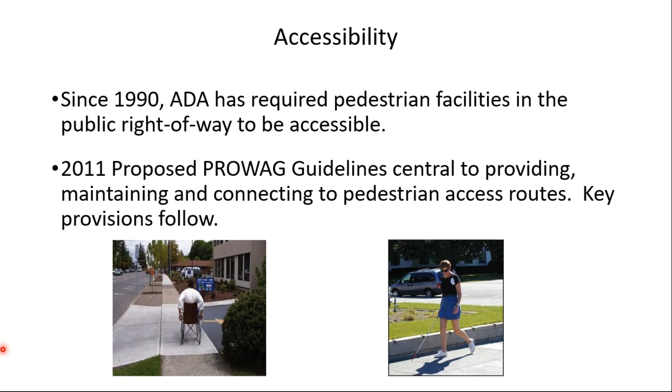PROWAG talks about what they call the PAR, the Pedestrian Access Route. Without going into the details, this is a summary of the requirements of the PAR.

It needs to be a minimum of 4 feet continuous clear width. The grade of the PAR, if it's along a road or street, can be the same as the road grade. But elsewhere, when the sidewalk departs from the street or diverges from it, the maximum grade is 5%. In fact, the maximum grade for a crosswalk is 5%, which means the maximum cross slope on a street or roadway is 5%. The cross slope of the walkway of the PAR is 2%.

The surface has to be firm, stable, and slip resistant. That implies asphalt, concrete, wood like a boardwalk, with an appropriate slip resistant mechanism if needed, or the same with a steel plank or something. But again, you have to worry about slip resistance with those surfaces.

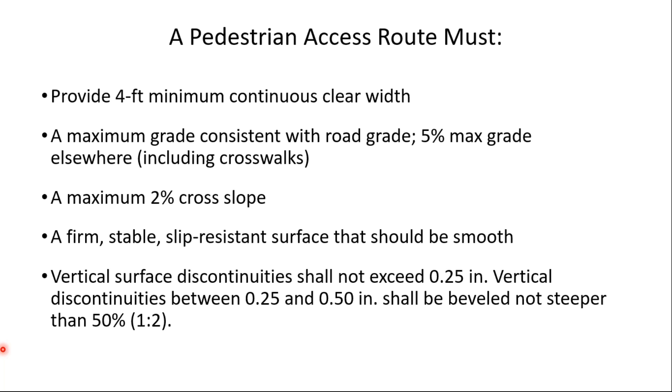It's not required, but my recommendation is that those surfaces be smooth, because for individuals in wheelchairs with certain types of spinal cord injury, vibration can be very painful. So even traveling over stamped concrete or paver block or brick can be very painful. My recommendation to designers is to make the travel surface smooth, and put any color or texture you'd like in the border area, buffer zones, or frontage zones. Also, there can't be significant vertical discontinuities in the surface, like heaved up sidewalk slabs or that sort of thing.

There should be connections, as we talked about yesterday. If your walkway or PAR is less than 5 feet, you need to have 5 foot by 5 foot passing spaces every 200 feet.

It's particularly important to pay attention to the placement of streetscape furniture. I don't want to discourage the use of street trees, bike racks, benches, trash receptacles, information kiosks - those are part of a lively, attractive streetscape. But I've seen some communities where it's organized in a way that creates an obstacle course for both blind pedestrians and individuals in wheelchairs. So if you can arrange your street furniture, or work with merchants and others in the community to arrange things so there's a 4 or 5 foot clear path, that would be better for the visually impaired and the mobility impaired.

Be alert for protruding objects - things that protrude into the PAR above 27 inches in height, like tree limbs, fire department connections, or pole mounted traffic signal controller boxes. The reason they're an issue is that a blind pedestrian can't detect them with the cane because they're higher than the cane detection area. So we should try to either eliminate them, like lopping off a low limb or branch on a tree, or else put something under the protruding object so that somebody can't walk into it or into that area.

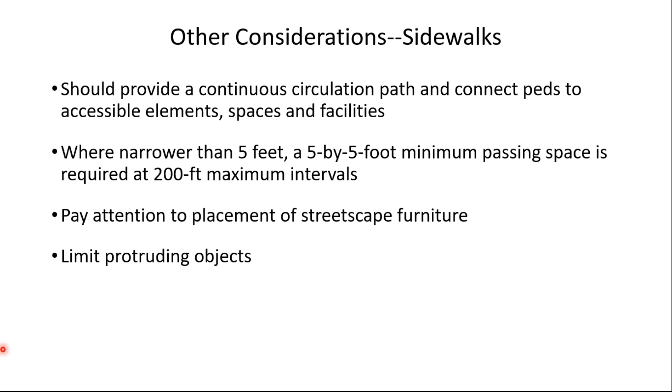We also need to make sure we provide turning spaces for individuals in wheelchairs or who use walkers or crutches, so they can turn on a level surface. When I say level, I mean 2% cross slope or less.

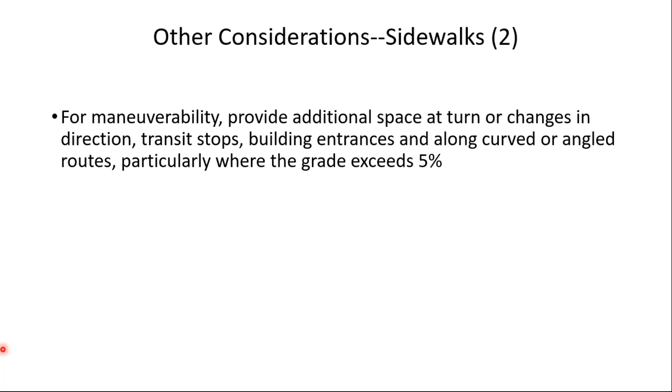So that's a quick overview of ADA, but it's important that we consider these things in our pedestrian design. I mentioned this in terms of surface treatments, paver blocks and so forth, joints - again, try to keep the travel surface smooth and put the texture and color maybe in the border areas. To me, that would be good design practice.

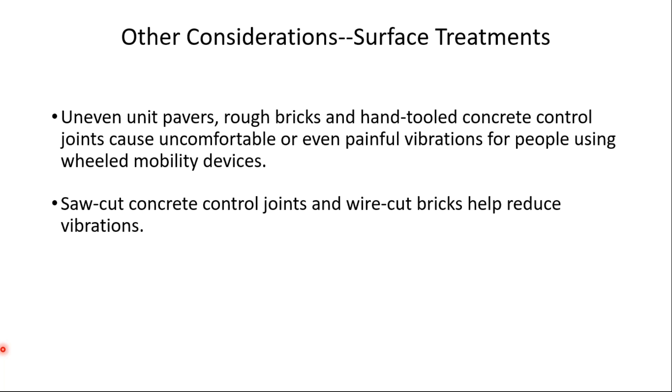And of course, curb ramps are needed to allow folks to move between the sidewalk and the street. As much as possible, they should align with the crosswalk. Diagonal ramps should be avoided since they direct pedestrians into the intersection and away from the crosswalk. Each curb ramp needs a turning space for a wheelchair or walker user to be able to maneuver. And then, at the base of the curb ramp, there needs to be the truncated dome detectable warning surfaces to alert pedestrians with visual disabilities that they're entering or leaving the roadway.

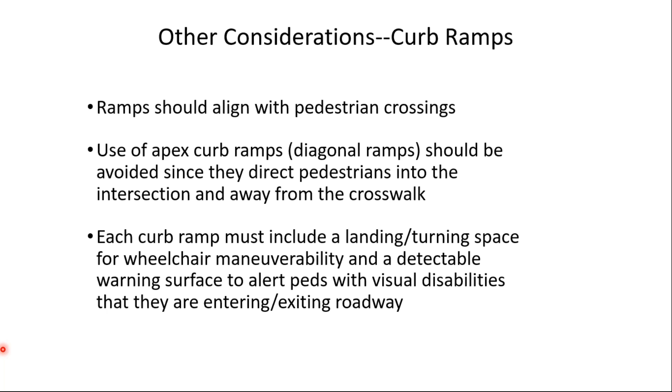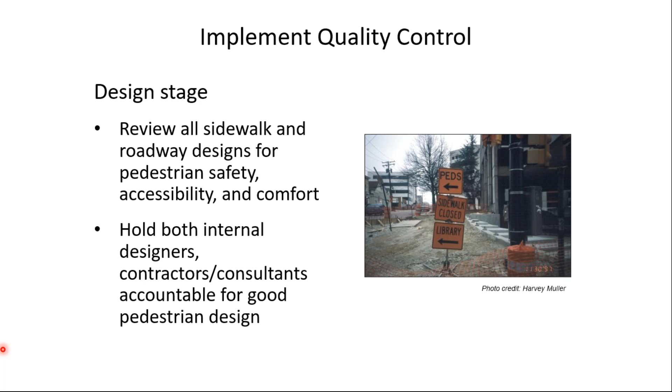We should think about quality control at the design stage. Be sure to review all sidewalk and roadway designs not only for vehicular movements, but for pedestrian safety and accessibility, and the comfort and pedestrian friendly elements we've discussed. Make sure in-house designers, consultants, and contractors are all held accountable for good, accessible pedestrian design.

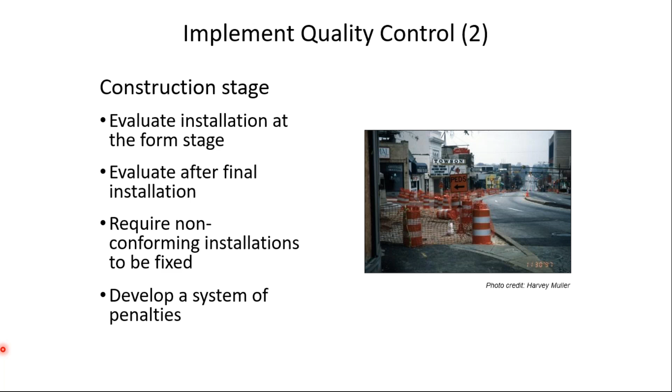Same thing at the construction stage: evaluate the installation at the form stage to make sure grades and cross slopes are compliant. After the concrete's placed, check it again, and if it's non-conforming, it may need to be removed and redone. Be sure you or someone you're directing does the actual measurements, and don't just rely on eyeballing it. People say 'it looks good to me, I've been doing this for years,' but maybe they've been doing it incorrectly for years.

Mike asked a question about what happens if there's a crosswalk you don't want pedestrians to use. We talked about posting a 'pedestrians prohibited' sign, but I mentioned that sign alone violates ADA because a blind pedestrian cannot detect that sign or get the message from it.

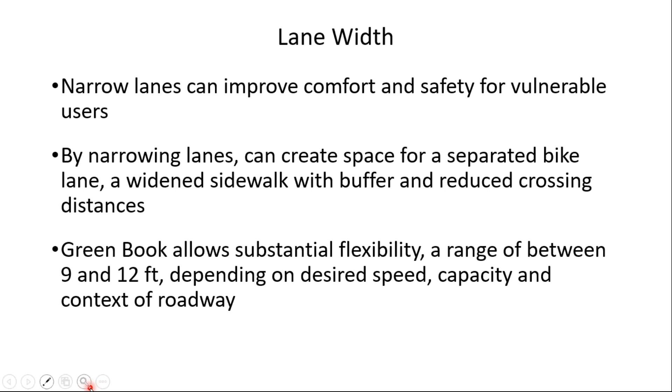So cross-section elements - the first one we'll look at is lane width, which is often an issue or concern for folks. The general thinking nowadays is that narrow lanes can improve comfort and safety for vulnerable road users, pedestrians, bicyclists. By narrowing lanes, you can create space for a separated bike lane, or widen a sidewalk, maybe allow a sidewalk with a buffer strip, and reduce crossing distances somewhat. As I mentioned yesterday, the AASHTO Green Book gives substantial flexibility here - lane widths between 9 and 12 feet, depending on desired speed, capacity considerations, and context of the roadway.

Another issue is shoulder width. If you have wide enough shoulders, that can improve bicyclist safety and comfort, especially on higher speed, higher volume roadways. The thinking is to accommodate bicyclists, a 4-foot or greater paved shoulder, continuous along the length of the roadway, should be provided, and 5 feet where you have barriers like a curb or guardrail along the road. I would certainly consider wider shoulders if vehicle speeds are greater than 50 miles per hour.

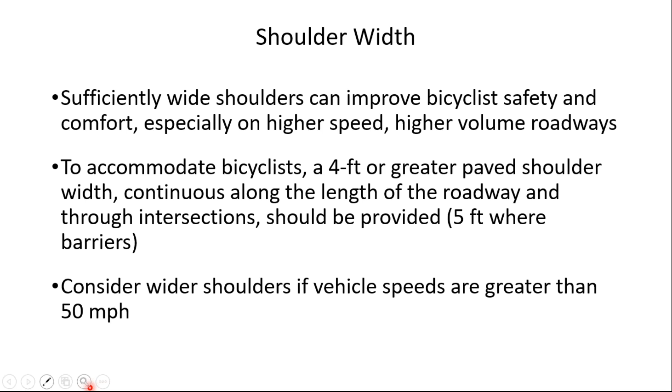When do we pave shoulders? The AASHTO Green Book gives some policies on shoulder width for different functional classes, and recommends that usable shoulders on arterials be paved. I would say designers should consider paved shoulders to accommodate bicyclists and possibly pedestrians in rural areas.

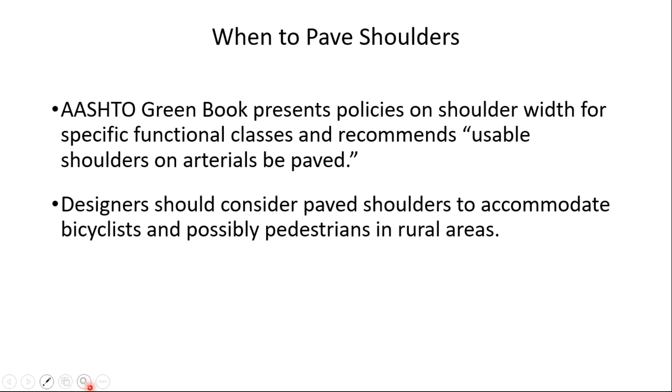Shoulders and different project types - we should think about capturing opportunities to include or upgrade paved shoulders during all types of roadway projects. Weigh the trade-offs such as safety benefits for all users, construction costs, and cost savings over the life of the roadway. The next few slides show examples during different types of roadway projects.

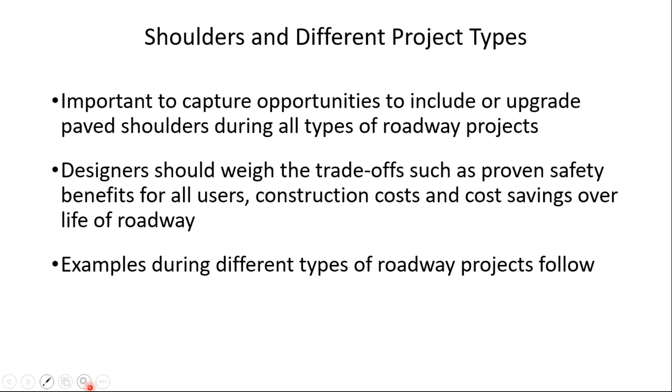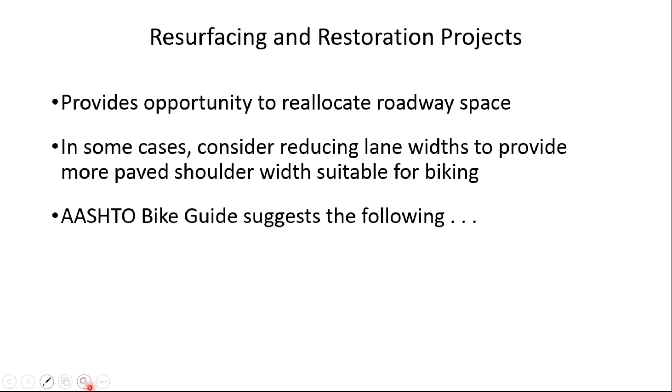The first one we'll look at is resurfacing and restoration projects. This may provide an opportunity to reallocate roadway space - consider reducing lane widths to provide a wider paved shoulder suitable for biking. The AASHTO bicycle guide suggests the following: note here on the left we have a 14-foot overall paved section for this direction of travel, a 12-foot lane and a 2-foot shoulder. But think about maybe a 10 to 11-foot travel lane and a 3 to 4-foot shoulder - still 14 feet overall width, but with the wider shoulder that would be a more bicycle-friendly configuration.

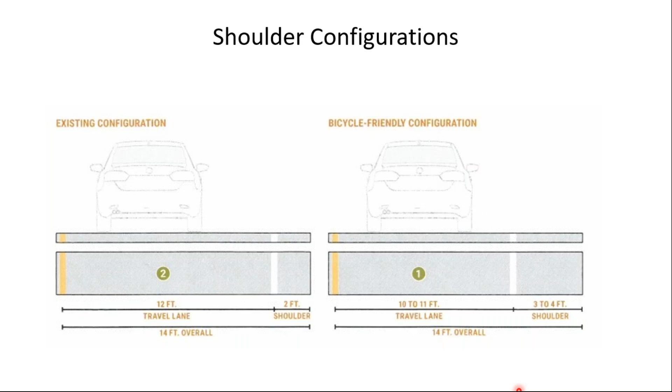What about rehabilitation projects? This could include complete replacement of pavements, which gives us the opportunity to add paved shoulders as the mainline pavements are replaced, or maybe a time to widen narrow paved shoulders, especially if you're adding rumble strips.

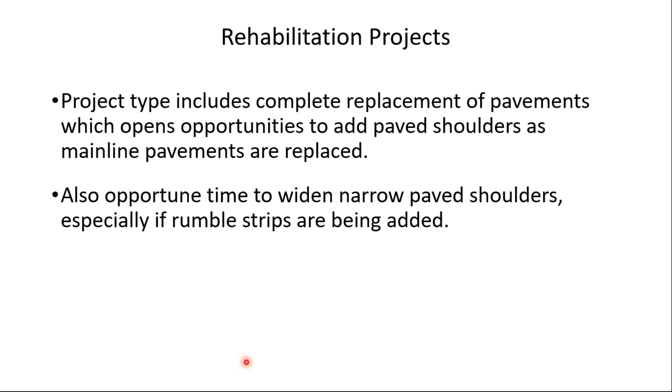What about reconstruction and new construction? Including paved shoulders on these projects is cost effective and should be considered both in rural and suburban arterial projects. Maybe a good time to think about other treatments like separated bike lanes, shared use paths, and sidewalks. These may be more desirable in urban and suburban locations where you have higher pedestrian and bicycle demand.

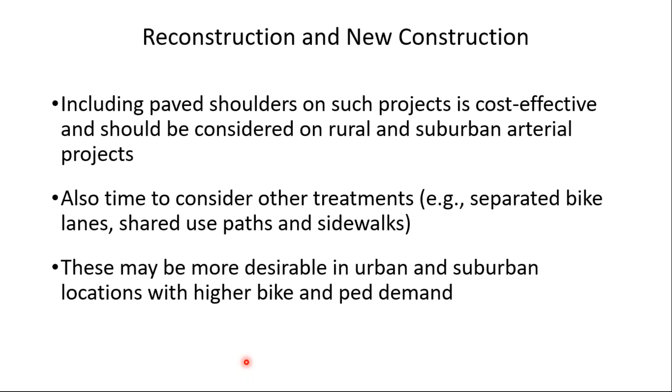And rumble strips, I showed you an example earlier from Mississippi. The AASHTO bike guide recommends a 4-foot clear space from the rumble strip to the outside edge of the paved shoulder, or 5 feet if there's an obstacle or barrier like a guardrail or curb. A reduced rumble strip length, or edge line rumble strips, or rumble stripes can be considered to provide additional shoulder width for bicycles.

Just one thing to keep in mind, I always trip over this myself: when they say rumble strip length, that's what I would call the width. It's measured laterally along the roadway, but in rumble strip terminology it's called the length. So instead of say a 10-inch rumble strip, you'd use maybe a 6-inch or even 4-inch rumble strip to provide additional shoulder width for bicyclists.

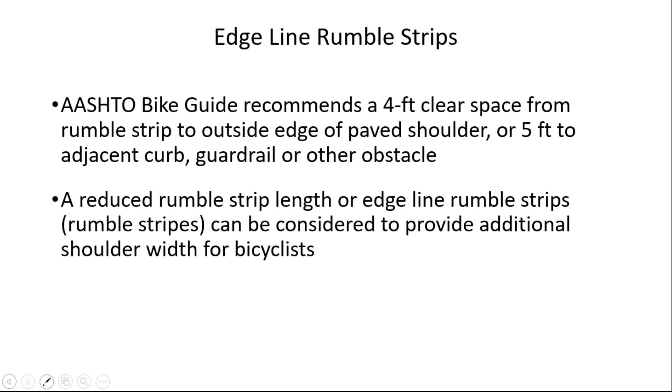Here are some sample cross sections. This one at the top I've called undesirable for bicyclists, notice it's a 2-foot shoulder with maybe a 16-inch or 12-inch rumble strip. So the shoulder is basically unusable by bicyclists because the rumble strip takes up the entire shoulder.

Here's an adequate cross section. Notice this is the narrower, shorter length rumble strip, maybe 6 inches. And notice this is the rumble stripe, where you place the pavement marking over the milled sections - that's called a rumble stripe. That allows additional shoulder width, in this case greater than 4 feet or more.

Down below is what I'd call a constrained cross section. The shoulder is less than or equal to 4 feet, and part of it is taken up by the rumble strip here, which looks a little longer than the one in the middle view. Certainly the bicyclist could use this shoulder area, but it's more constrained than the one above it.

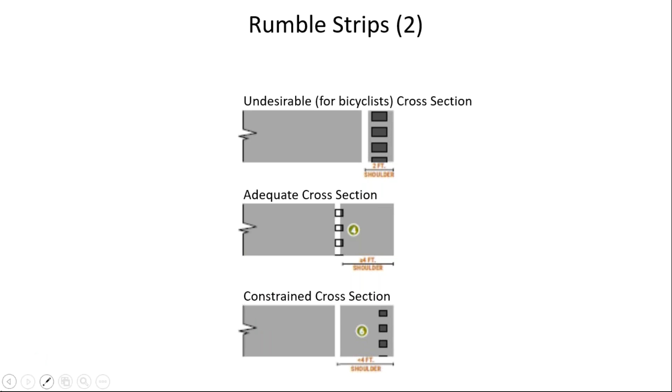Also, the AASHTO Bike Guide recommends providing 12-foot minimum gaps in the rumble strips, spaced every 40 to 60 feet, to allow bikes to enter and exit the shoulder as needed, so they don't have to pass over the actual rumble strip. Some agencies use what they call bicycle tolerable rumble strips, which aren't quite as deep as a normal rumble strip. But the bicyclists I've talked to still don't consider these to be very rideable - they may be called bicycle tolerable, but I'm not sure all bicyclists would agree with that.

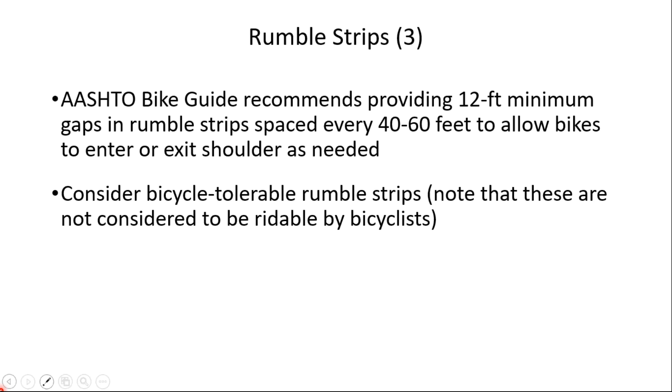Here's an example of what I'm talking about. Notice here's the travel way in one direction, here's the edge line, and here's our edge line rumble strip. But notice here's a 12-foot or more gap, spaced every 50 feet or so, so that the bicyclist can move between the traveled way and the shoulder. Studies show that in terms of roadway safety, this still provides the warning function for motorists that might leave the road, but also is much more bicycle friendly.

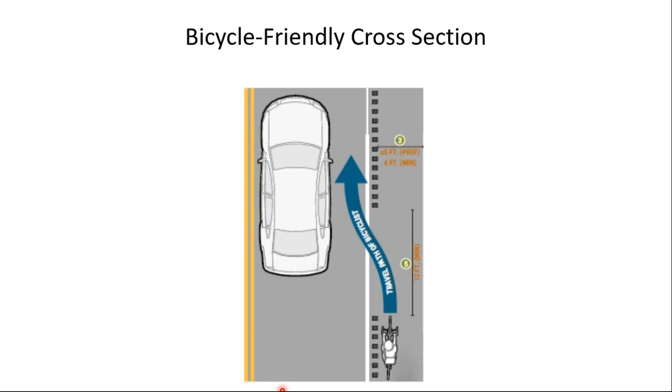To me, this would be a practice to avoid. Notice with the location of the rumble strip there, the shoulder is essentially not usable by bicyclists. It might be better to have the rumble strips here at the back edge of the shoulder.

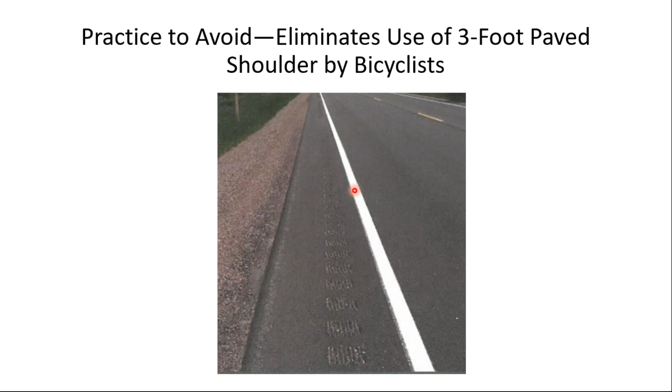Rumble strip placement - I forget exactly when, but it's been a few years now - FHWA sponsored some research that concluded that for rural 2-lane highways, not for freeways or limited access roads or other functional classes, there's no relationship between longitudinal rumble strip placement and crash reduction. So what that's saying, if you'll allow me to back up: there shouldn't be any effect on crash reduction if we put this rumble strip at the back of the shoulder versus here, or versus a rumble stripe. On rural 2-lane highways, this FHWA-sponsored research indicated there's really no relationship between rumble strip placement and crash reduction.

Placement according to the AASHTO criteria I shared with you - at least 4 feet of usable pavement shoulder between the rumble strip and the edge of the paved shoulder - has the least negative impact on bicyclists. If you can't provide at least 4 feet of pavement, placing the rumble strip at the edge of the paved shoulder, and narrowing it if necessary, will give the most paved shoulder to be used by bikes immediately adjacent to the travel lane, as I said with respect to the previous photo.

This would be the bicycle-tolerable rumble strip, 0.375 inches deep, that's 3/8 inches, and as narrow as 6 to 8 inches. It gives an alert to drivers but gives more space for bikes to operate. It's also not quite as deep as the conventional rumble strip, but I'm not sure everyone would agree it's bicycle tolerable. Still, I'm certainly a fan of narrowing your rumble strip.

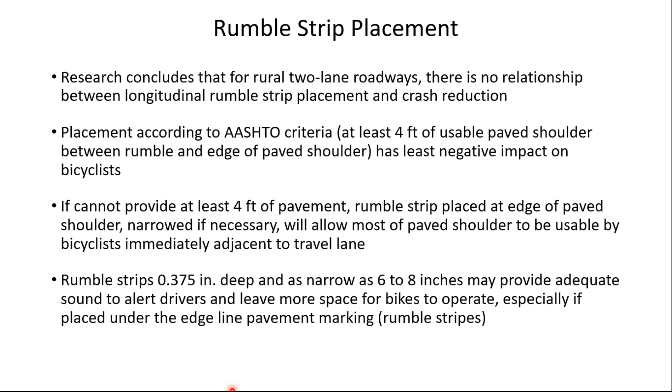But I should note, in general, a shoulder, even a paved shoulder, is not part of the pedestrian access route. There are a few locations I'm aware of around the country where the paved shoulder has been designated as part of the pedestrian access route, and in that case it does need to comply with the PROWAG requirements.

A big issue with that, to me, is how do you separate the traveled way from the shoulder for the blind pedestrian? You need some sort of detectable edge or guidance surface to prevent the blind pedestrian from accidentally wandering out into the roadway, which is certainly not a good situation.

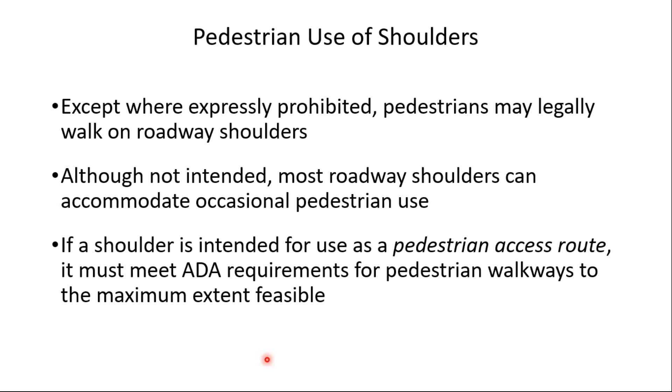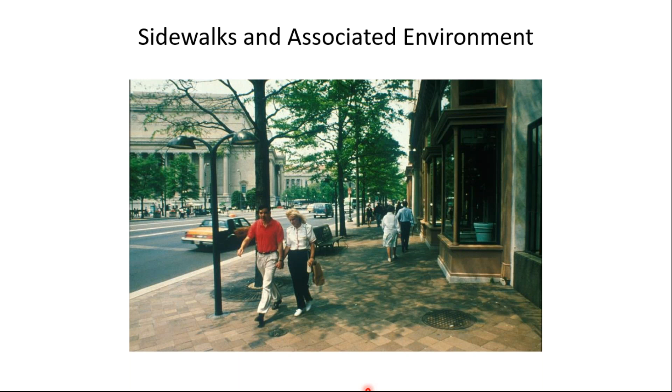Buffer strips, furniture zones, or tree lawns - I saw a slide once with something like 100 different names for that configuration, but they are desirable as part of the pedestrian environment. They improve pedestrian safety and enhance the overall walking experience. In northern areas, like in Ohio or West Virginia, they provide snow storage, some splash protection for pedestrians so they're not right at the back of the curb, and give some space for street furniture. So there's a number of advantages.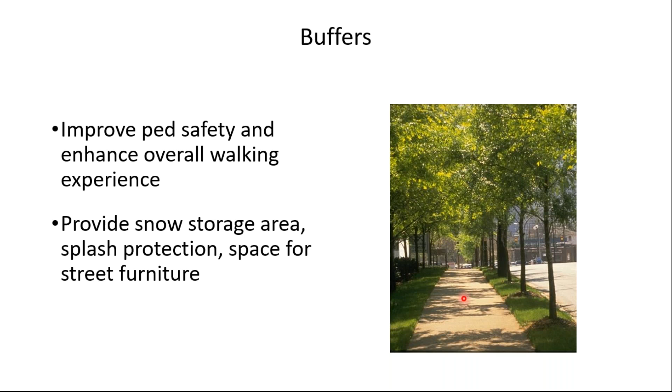As I alluded to earlier, I think it's important, if it's not your area, to seek help or the expertise of an arborist, an urban forester, or someone with that experience and knowledge who can recommend appropriate tree species for this particular situation. And maintenance or tree trimming, vegetation management is important so that we don't have low-hanging tree branches or limbs that can become protruding objects for the visually impaired, or really for any pedestrian, but specifically for the visually impaired.

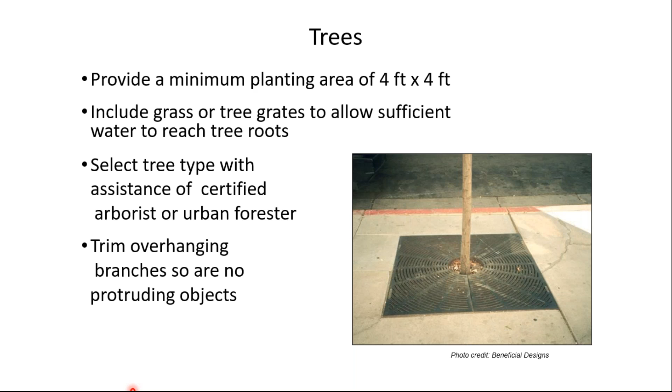I don't know if anybody has these, but questions sometimes come up about serpentine sidewalks. If folks have comments or experiences, I'd be glad to hear those.

My opinion is that for a sidewalk like this, along a road or street where you're probably going to have people walking from home to school, home to the pharmacy, home to work, or whatever it might be - using walking as a transportation purpose, or even for moms and dads pushing strollers - people are interested in getting from point A to B in the least distance, the least effort. So a serpentine sidewalk doesn't provide that.

These may be appropriate, in my opinion, in an area that's historical or natural, or some other area, maybe a park, where people might wander slowly through with interpretive displays or something like that, and they're not trying to get from point A to B to some destination, like to work or to school or whatever it might be.

But also think about if you're a blind pedestrian using a cane trying to follow a shoreline - that would be crazy to try to follow if you were blind, or even someone in a wheelchair. You'd probably have to keep turning your wheelchair to navigate some of those turns, and that's just an unnecessary expenditure of energy.

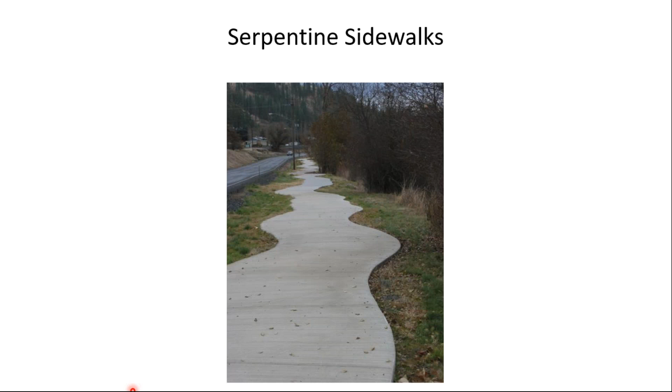Or even imagine you're the person with the skid steer or the tractor with the broom on it clearing snow off of that in the wintertime - that's not going to be a straightforward job either. So I've heard that developers like these because they look good on Google aerial photos, but from a practical, functional standpoint, I'm not a fan of serpentine sidewalks.

Many of you are familiar with the highway capacity manual and the level of service concept for vehicular traffic. We might consider what goes into pedestrian level of service, because it's a totally different perspective than motor vehicles, which consider things like speed, delay, and spacing between vehicles. Those are not really issues for pedestrians.

So here are some things that might go into considering pedestrian level of service, some of which we've talked about already. One is personal safety, meaning the threat of a crash with a motorized vehicle, a bicycle, or an e-scooter—personal safety relating to conflict with other road users.

But then there's also the personal security aspect, which I mentioned yesterday—fear of assault more generally, not a specific traffic safety threat.

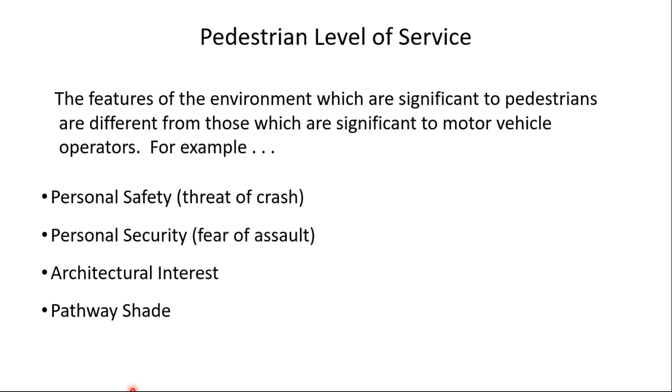I also mentioned architectural interest as a consideration. Motorists on a high-speed roadway are probably not looking at architectural features adjacent to the road, but pedestrians can and often are interested. Pathway shade and street trees are important—I showed you that scene from Las Vegas yesterday that lacked any sort of tree or shade at all. Pedestrian scale lighting, like we saw in that Pennsylvania Avenue scene.

And then amenities such as benches, information kiosks where appropriate, and pedestrian scale wayfinding—distances and directions to pedestrian destinations.

Interestingly, the presence of other pedestrians tends to draw more pedestrians, because the number of people tends to draw more. You may have seen that in the street scene I showed you in Seattle yesterday—that was a Sunday morning, but by afternoon that sidewalk may have been filled with pedestrians. I mentioned our trail system here in the Morgantown area—on a nice spring day, some people show up walking, biking, or on inline skates, and it draws other people as well, becoming kind of the hub of the community at that time. So the presence of other people makes something more attractive.

And then, we'll talk about this later, conditions at intersections where pedestrians have to cross roadways or bicycle facilities need attention, because those conflicts or potential conflicts, and how they're handled, are something to consider.

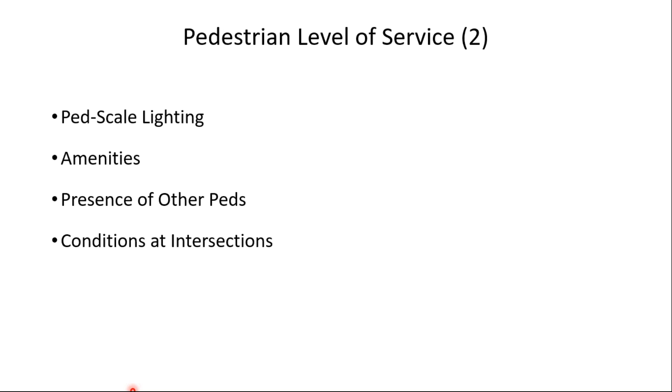Another thing to consider, where you have it, is to take advantage of water. This may not be a typical example—this is Portland, Oregon, their waterfront along the Willamette River, which can handle ocean-going vessels this far up, creating interest from all types of maritime vessels. You can see it's attractive.

It is drawing people—they're not in the foreground when I took the picture, but you can see a number of people in the background. It's an interesting streetscape that attracts people and is part of an active pedestrian facility, an active community. It doesn't have to be on this scale.

Where I am in Morgantown, West Virginia, we're on the Monongahela River, which flows north to Pittsburgh. I've been here over 40 years, and when I first came, the river was mostly ignored, other than for commercial barge traffic hauling coal out of the region. The buildings had their backs to the river, and no one would really even go near it. But things have changed, and I think nationwide attitudes about rivers and waterways have changed too.

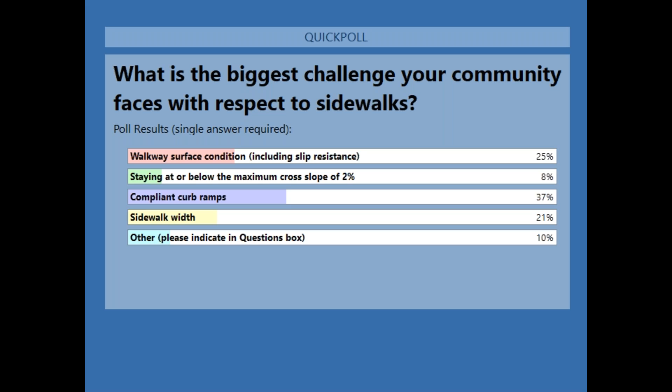And Ron, do we have time for another question? Yes, sir. Okay, question from Jonathan. Does PROWAG give guidance on when or if to restrict bicycles from using sidewalks? He believes some communities have rules against bicycles using sidewalks in high-density business areas.

Yeah, good question. I'm aware too of a number of communities around the country that do restrict bicycles from sidewalks, again, kind of in the heart of the business district, as the question implied. And I'm aware some of them may make an exception for young children, just for safety reasons, so they're not in the roadway. But the question was about PROWAG. PROWAG does not, I believe, specifically address that.

But I would say, and again this is just personal opinion, that accessibility considerations would be one reason why a community may want to ban bicycles from certain sidewalks, because of the potential conflicts. Bikes moving quickly and maybe someone with a mobility impairment not moving so quickly, or maybe they move to the side quickly and be run down by a bike or something like that. And then, of course, the whole issue of those with visual impairments may not be able to see the bicycle in time to take action or make an avoidance maneuver. So those PROWAG considerations may be a reason for why you would want to ban bikes from sidewalks. It sometimes comes up recently with e-scooters and other micro mobility devices on the sidewalk. That is an issue that often comes up with the visually impaired community: you're allowing all these other users on the sidewalk and we can't see it, we can't take appropriate action.

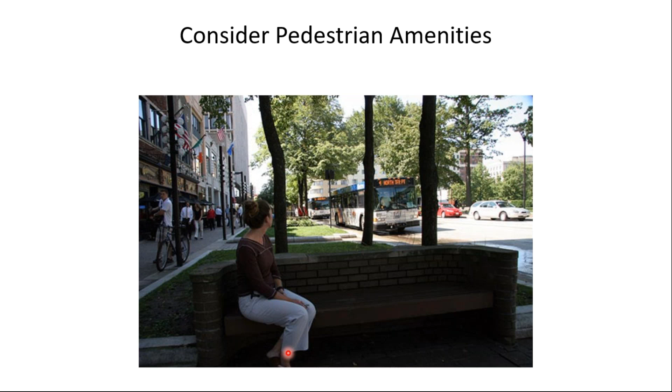Okay, one more thing I wanted to mention, and this may seem strange because it's not really a walking facility, but part of an overall pedestrian environment is what's called public space, and I'll add the word attractive. To me, there should be attractive public space. This is Pioneer Square in Portland, Oregon. Some of you may be familiar with it. It's kind of well known in the literature, I believe.

And to me, it's kind of neat. It takes up a whole city block. I'm just showing you a portion of it here, probably not even a quarter of it. But what's neat to me as a transportation professional is, decades ago, this was a block-sized parking structure. And when Portland made the decision not to have any interstates in the heart of the city and to move toward their light rail transit system, they were able to tear down the parking structure and replaced it with this Pioneer Square.

Would you agree with me? Obviously this is a nice day in Portland, you can see, but there must be something attractive about this because it's drawing a lot of people to this particular corner of Pioneer Square. So we might take a minute to look at this.

To me, it's colorful with the flowers, flower vegetation. It's kind of broken up. As I said, this is just one corner, and not the whole thing looks like this, but even this one corner is sort of broken up in terms of space. Notice there's some sun for folks that want to sit in the sun, but there's also some shade in the background for folks that don't want direct sunlight. The trees in the background probably provide some wind protection, so you're not going to get wind blown sitting there.

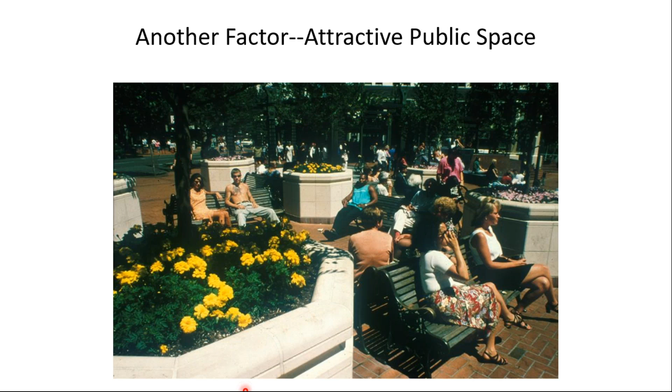It's probably as much art as it is science, but this is just my list of key characteristics of successful public spaces. We've talked about a lot of these already. And there should be, even if it's a big space, it should be broken up into smaller units that promote interaction of people.

There should be eyes on the street so that people in the square think that people, whether it's in the square or in the surrounding buildings, can be looking out for them and see what might be going on. There should be attractive and colorful sun and shade, wind protection. I think we've talked about all these.

So with that as background, let me share with you a scene. This is the campus of West Virginia University. I spent most of my career on the faculty at WVU teaching in the civil engineering department. I'm retired now, but I was fortunate enough to have an office on the 6th floor of the 10-story engineering building, so I had a great view beyond what you see here.

A few years ago, I was in my office. It was early April, I believe. I think it was the first day that year the temperature went above 70 in Morgantown. You can see the trees are blossoming. I'd been working, and I got up maybe to go to the vending machine and grab a snack for lunch, and I looked out the window and I saw this, and I thought, I've got to capture that. Remember, this is a nice spring day on a college campus around 12 noon on a weekday.

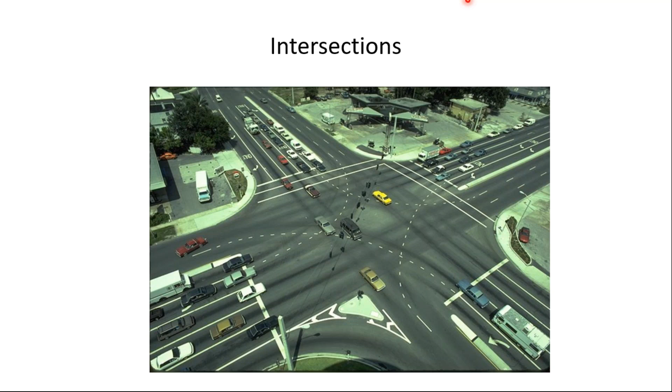Design guidance would be to design all your intersections with the assumption that pedestrians are going to be present. I show this as an exception, but really this is probably unique maybe in the world—Las Vegas. Years ago, Las Vegas had a serious pedestrian safety issue, not only at intersections but just along roadways generally. Pedestrians would cross anywhere between blocks, and they had a serious safety issue.

One thing they've done at intersections is really prevent pedestrians from crossing at grade. They had the benefit, I guess, of these casinos that helped contribute significantly financially. For example, here the crossing is, you can go up a stair or an escalator, or there's also an elevator, and there's a nice, fairly wide bridge structure that crosses over. Then again there's elevators, escalators, stairs, depending on your wishes and abilities in terms of mobility, to descend to street level. Just barely out of view on the left you can see the stairs or escalators, and that exists on all four approaches to the intersection.

I said yesterday, if you don't want pedestrians in the street or the intersection, you really need to put up barriers, and these are pretty significant barriers above and beyond just accessibility. They really don't want anybody in the street. As I recall, this one actually had a sawtooth edge on top, so they don't even want you grabbing that and vaulting over it. But apparently this has been very successful, and their pedestrian crash rate has declined significantly because you don't see any pedestrians in the intersection. But most of us don't have that luxury of grade separated crossings at our intersection approaches, so we need to design all intersections assuming pedestrians will be present.

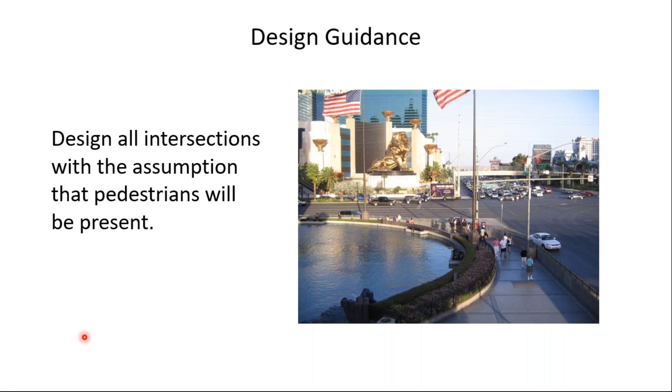Some intersection design principles related to pedestrians: encourage pedestrians to cross at the corners, make sure pedestrians are visible to traffic, and likewise make vehicular traffic visible to pedestrians so they can see it. Try to make pedestrian actions predictable, minimize the time pedestrians are in the road, try to shorten the crossing distance, and do what we can to slow or calm vehicular traffic.

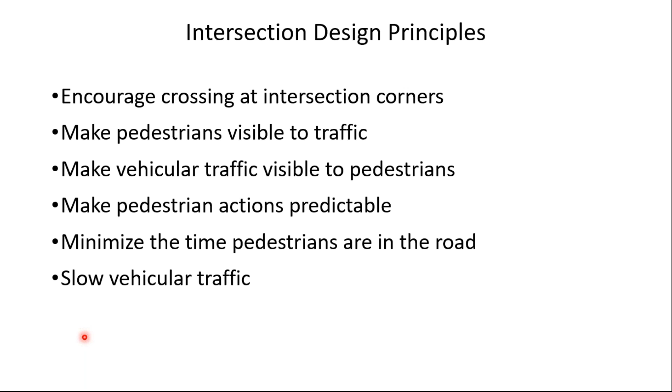Sight distance, I mentioned, is critical. One way to improve it is to install curb extensions. Make sure you trim your vegetation, and also avoid clutter at the intersection.

This is a tale of two corners, in different communities. Notice we have curb extensions or bulb outs here. I'm not sure they have compliant detectable warnings at the base of those ramps, but I like this design because the curb extension allows the pedestrian to be out here. So if there's parked vehicles, which there weren't the morning this photo was taken, it allows pedestrians to better see oncoming traffic, and likewise traffic can see the pedestrian. I like it because, though it looks plain and ordinary, it has good sight lines.

The one on the right, which looks like a newer design, some would say more attractive, more aesthetically pleasing. But the issue I have is notice the size of these planters and the vegetation in them. There could be a person in a wheelchair or a child walking toward the intersection, toward the crosswalk, that a driver on this approach may not even see. This concerns me from a safety standpoint, and I don't think it provides adequate sight lines. So be careful—I don't have an issue with putting planters there, but let's use appropriate design that doesn't interfere with sight lines.

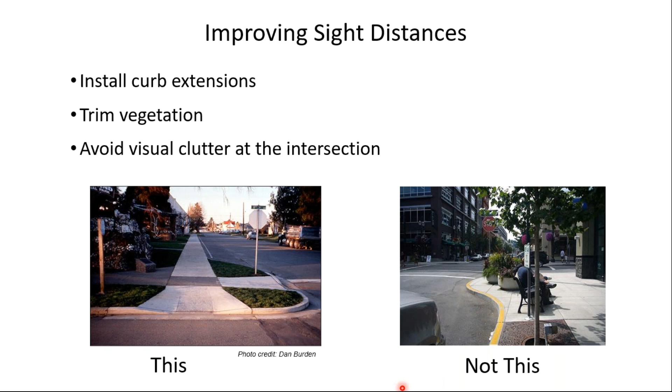I mentioned earlier the channelized slip turn lanes. These are a bane even for able-bodied pedestrians, let alone visually impaired pedestrians. Because if you think about it, this vehicle making this right turn, the radius is such that they can make that turn at fairly high speed. And the attention of the driver is focused over their shoulder, looking for a gap in traffic so they can merge. They're not really paying attention or expecting pedestrians or bicyclists in front of them. So an issue is, how can we design that situation to make it more friendly for vulnerable users?

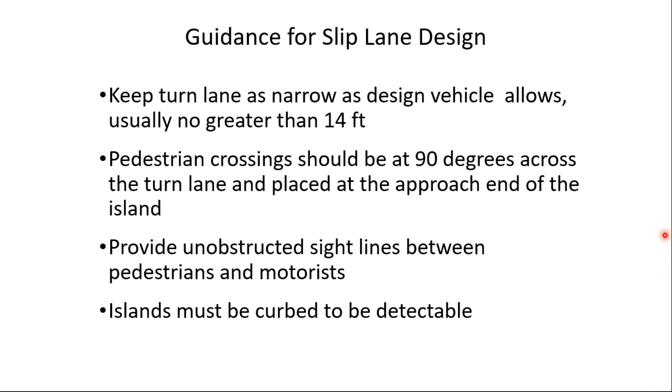Here's some guidance. Keep the turn lane as narrow as the design vehicle allows, usually not more than 14 feet. Have the pedestrian crossing at 90 degrees across the turn lane, placed at the approach end of the island. Make sure your sight lines are good, unobstructed, and the islands have to be curbed to be detectable—you can't use painted islands. So these islands here have to be curbed islands, so they are detectable.

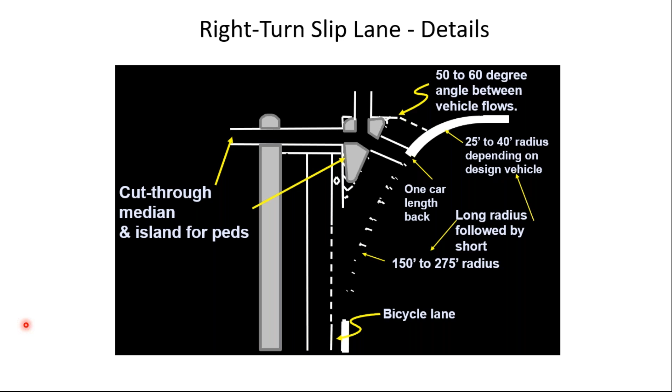Here are some of the details of, let's say, a pedestrian friendly right turn slip lane, or at least one that's better than the conventional design. Notice it has a different radii, 50 to 60 degree angle between vehicle flows. The crosswalk here is one car back from the yield line or stop line, and these are raised islands. One interesting thing is that agencies using this design, as an unintended consequence, find not only better pedestrian safety performance, but also reduced rear end crashes between motor vehicles. These right turn slip lanes not only are an issue for pedestrians, but tend to have a high frequency of rear end crashes, so this design improves vehicular safety overall.

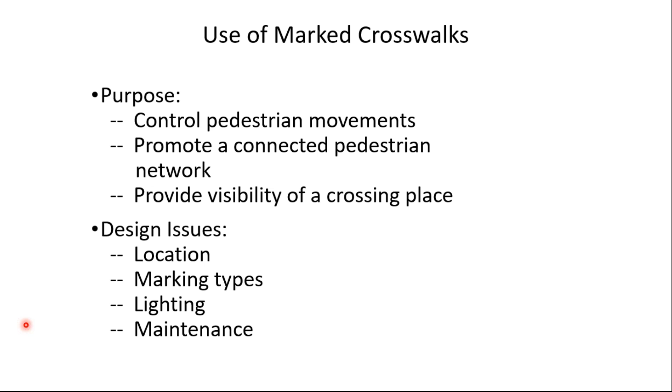Use of marked crosswalks to control pedestrian movements helps promote a connected pedestrian network, and provides visibility for both pedestrians and drivers of the crossing place. There are some issues: where do we locate them? What marking types? What about lighting? What about maintenance?

Crosswalk markings give guidance for pedestrians crossing the roadway. They define the path, especially helping low vision pedestrians. There should be enough contrast between the white marking material and the roadway surface so low vision pedestrians can navigate across the street. They let drivers know there's a pedestrian crossing point, especially at a mid-block crossing, and crosswalk markings legally establish the crosswalk.

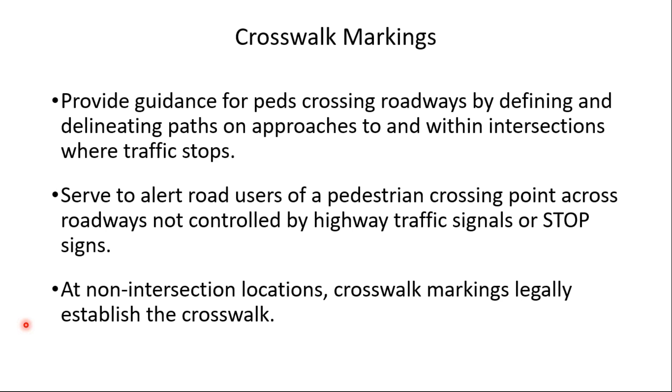So really, probably all of these would be appropriate marking patterns. I'd add that the diagonal, the zebra or ladder, and the continental designs have more marking material, so they are more visible to drivers.

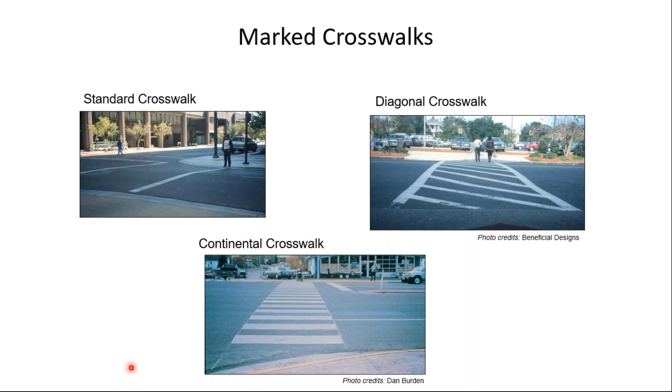Some of you may have raised crosswalks where the crosswalk is on top of a speed table or speed hump. That's a good way to get some traffic calming. It also elevates the pedestrians a few inches, maybe improving drivers' ability to see the pedestrian.

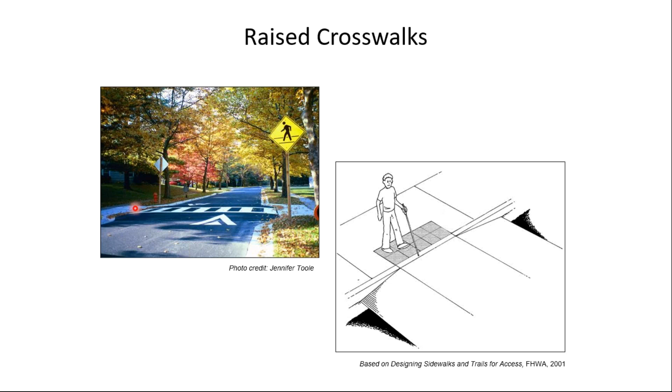Because the crosswalk surface here is at the same elevation as the sidewalk, we need, for ADA and for the visually impaired, to have truncated dome detectable warning surfaces on both sides of the crosswalk. It's hard to tell with the leaves if they exist here in the photo. It almost looks like maybe they don't, but there should be detectable warning surfaces at this end and at this end, if they're not there.

Try to design the crosswalk with the fewest possible conflict points with traffic and the shortest crossing distances. Make sure the markings are in alignment with the connecting sidewalks.

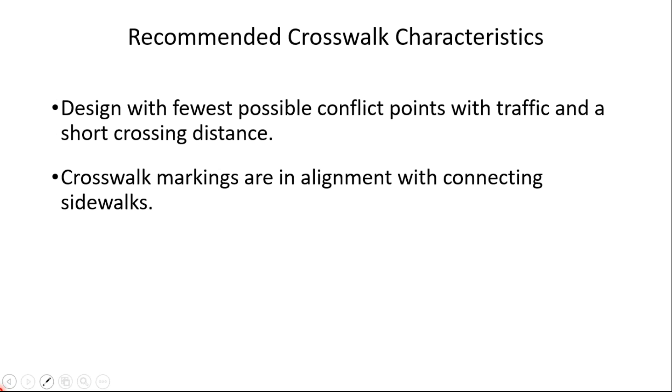Countdown signals are beneficial to pedestrians, in terms of letting pedestrians judge whether they have time to cross the street or not. I think their safety benefits have been demonstrated.

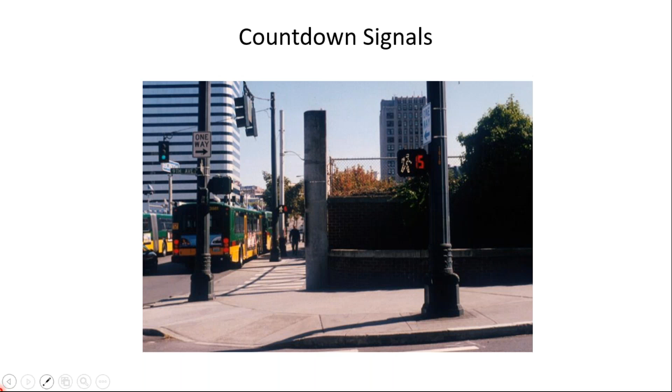What about walk indications for signalized intersections? PROWAG requires an audible and vibrotactile walk indication. The audible walk indication is a tone or speech, depending on the spacing of the push buttons. The vibrotactile indication means the surface vibrates when the walk indication is on, so that someone with a vision and hearing impairment can know when the walk indication is on. And the push buttons need to be located close to and in alignment with the crosswalk.

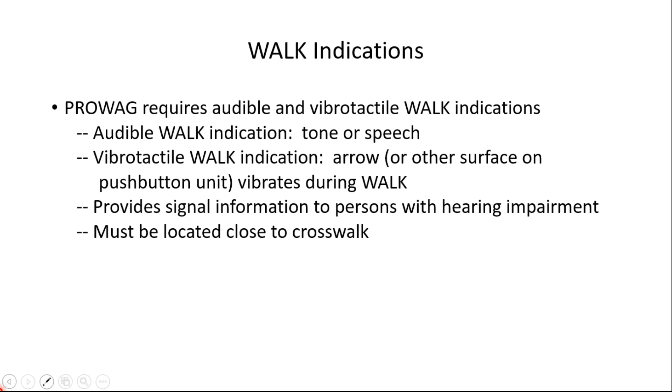Median islands, I mentioned those earlier. I think these are good to help with pedestrians. We call them a pedestrian refuge area in some cases - we'll talk about what the definition of that is. Here, a pedestrian can cross this direction of traffic and then wait safely in this refuge area, then cross, making the second stage crossing, if you will, to cross the other direction of the street. Depending on the dimensions and other characteristics, they may actually be an attractive enhancement or green space in the community.

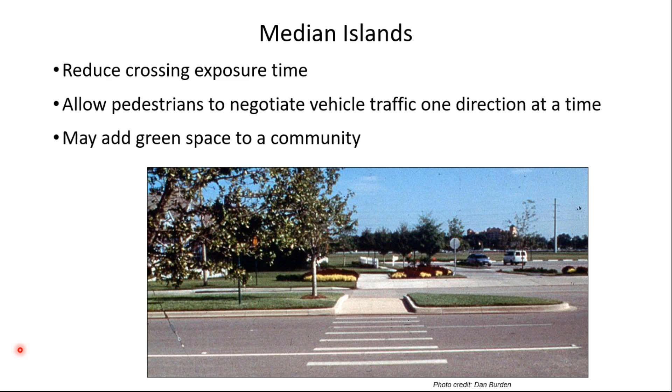The Federal Highway Administration has identified pedestrian refuge areas as one of their proven safety countermeasures, pushing the use of pedestrian refuge islands. They've demonstrated a 46% reduction in pedestrian crashes, so that's significant.

The AASHTO PED guide says consider refuge areas where the crossing exceeds 60 feet. And in that initial image I showed you, that older aerial photo, those crossing distances, as I recall, were more than 60 feet.

In terms of design, the refuge islands must be a minimum of 6 feet in the direction of travel. You can have an island that's less than 6 feet, but it would be considered a pass-through or cut-through - in other words, we don't want pedestrians hanging out there. It's not a refuge island, so the refuge island must be a minimum of 6 feet in the direction of pedestrian travel.

Something to consider: say you have a trail crossing a roadway, like a shared use path or multi-use trail. There you may want to think about having a minimum distance in the direction of pedestrian or bike travel of 10 feet, to accommodate a bike with a trailer. Not recommending that for every crossing, but where you have a shared use path or trail crossing a roadway, you may want to make the refuge area 10 feet rather than 6 feet. And the refuge areas need to be at least 5 feet wide.

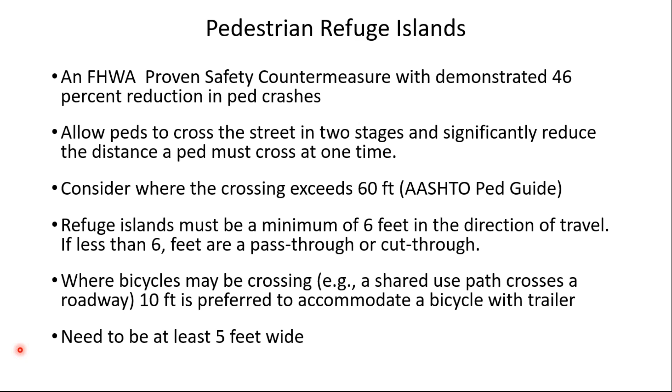Here's an example. Notice again, breaking that long or complex crossing up into two simpler crossings. The pedestrian can wait down here and check - you see their field of view here - for traffic in one direction. They don't have to worry about traffic in both directions. Then they cross, and this has to be some sort of raised island, so it's detectable to the visually impaired. They can wait safely in this refuge area, and then they just have to worry about checking traffic to their right, and cross at right angles.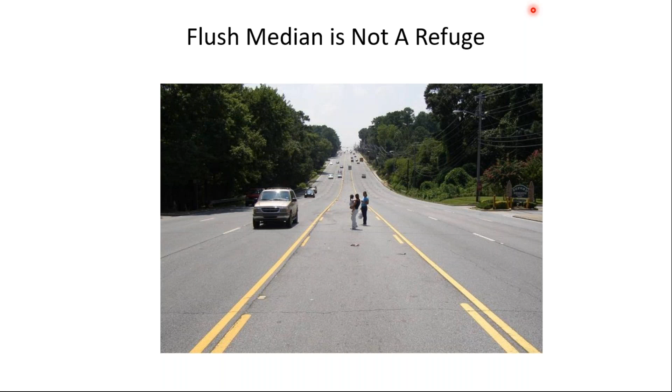But we have areas in Morgantown with fast food establishments, restaurants, coffee shops, hotels, and stores on both sides of the street, with vehicles turning left and right pretty much at all times, plus through traffic on the arterial. Over the years we've had 2 fatal pedestrian crashes, both at night, both involving left turning vehicles, probably because left turning drivers don't expect pedestrians and can't see them at night. It's just not a good combination.

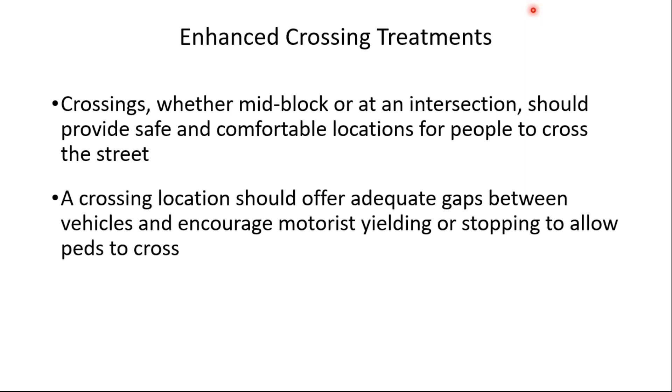Think about enhanced crossing treatments, whether mid-block or at an intersection. Crossing locations should offer adequate gaps between vehicles and encourage motorists yielding or stopping. What does the AASHTO PED guide say about mid-block crossings? It says they're preferred because pedestrians shouldn't be expected to make excessive or inconvenient diversions to cross at an intersection. In all locations, enhanced pedestrian crossing treatments should be considered based on the number of vehicle travel lanes, the speed of traffic, and the volume of vehicular traffic. By enhanced treatments, they mean signing, flashing lights, a raised crosswalk, speed table, something above and beyond just marking the crosswalk and putting in standard crosswalk signing.

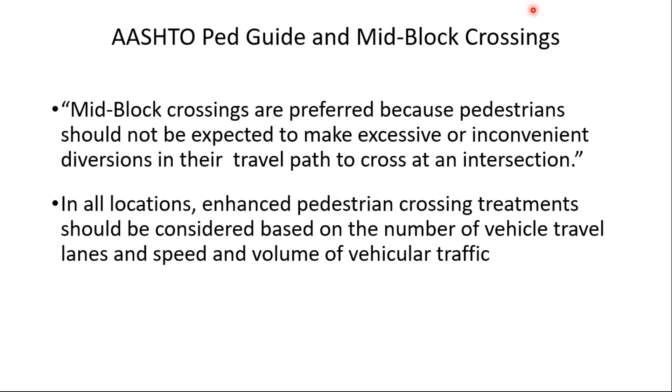When do you mark a crosswalk? This is always an issue, I think. The MUTCD says crosswalk lines should not be used indiscriminately. Before a mid-block crosswalk is installed, a traffic engineering study should consider things like the number of lanes, distance to adjacent intersections, pedestrian and vehicle volumes, and vehicle speeds. I'd add pedestrian crash experience, and probably also look at the area around it. You may not have much pedestrian traffic now, but that may be because pedestrians are apprehensive about crossing there. But there may be certain land uses that, with appropriate enhanced treatments, if a crosswalk were installed, it might attract more pedestrians. So we need to keep that in mind as well.

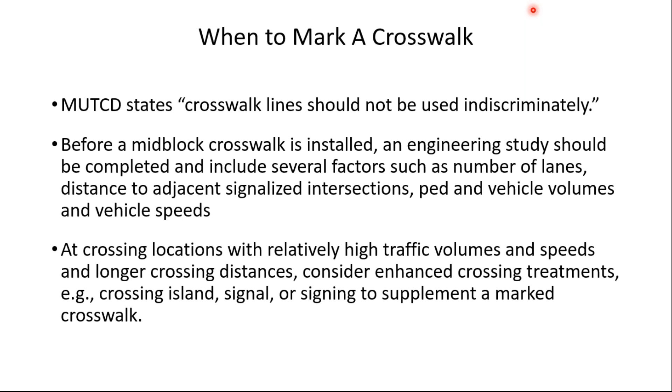In some cases with high traffic volumes and speeds, think about crossing islands, refuge areas, signals, or signing, or as I mentioned, even speed tables.

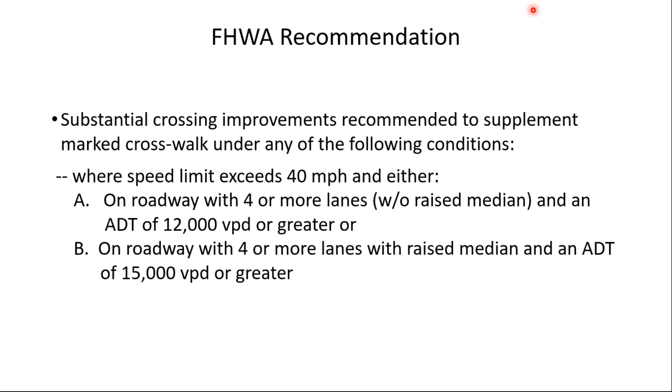FHWA says substantial crossing improvements are recommended to supplement marked crosswalks under any of the following conditions: where the speed limit exceeds 40 miles per hour and either on a roadway with 4 or more lanes without a raised median and an ADT of 12,000 vehicles per day or greater, or on a roadway with 4 or more lanes with a raised median and an ADT of 15,000 vehicles per day or greater. Additional treatments include advanced yield and stop lines and signing.

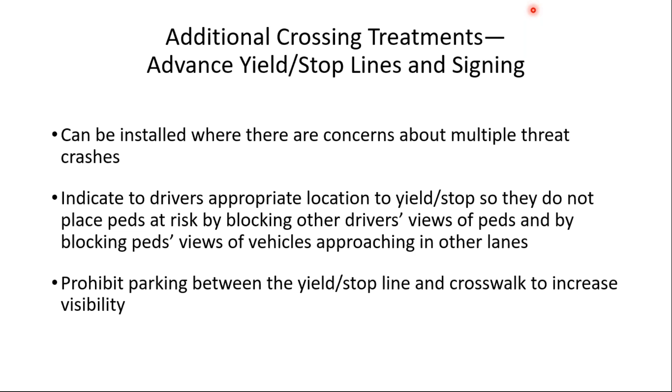This is a serious issue. In fact, in the last probably 3 years, we've had 2 pedestrian fatalities in Morgantown, and both have been the multiple threat type, so it is a serious issue.